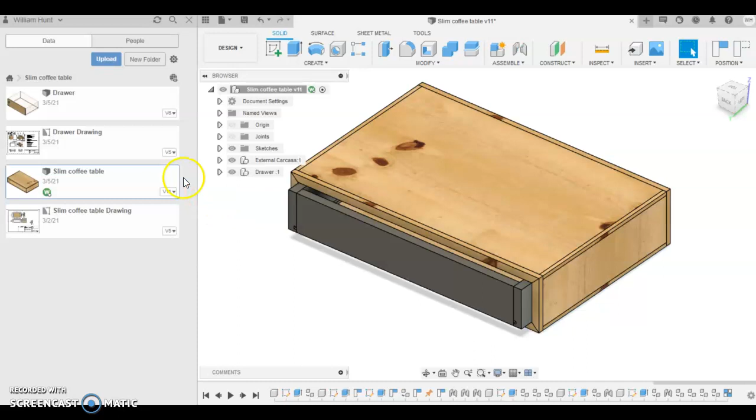I've been drawing up the slimline coffee table, and what I would like to do now is move to make some legs. What I'm going to do is come up to get a new file going.

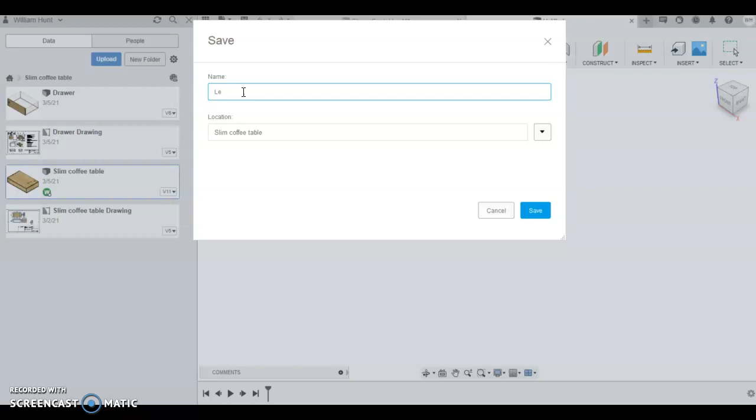I'll save that file, and I want to save it in the same folder. I've already located a folder called Slim Coffee Table. This one's just going to be called leg. We're going to use the leg 4 times, but we're only going to model it once.

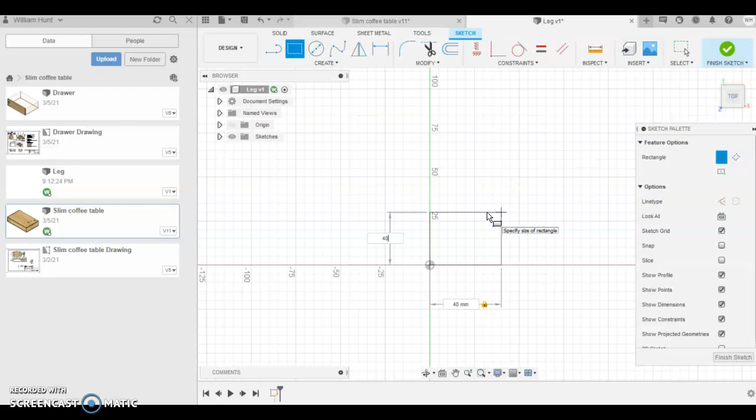I'm going to get the sketch, and start the sketch on the floor, on this plane here. The material we're going to use is 44 by 44, but I'm going to have my final size as 40 by 40, so that's our machine size.

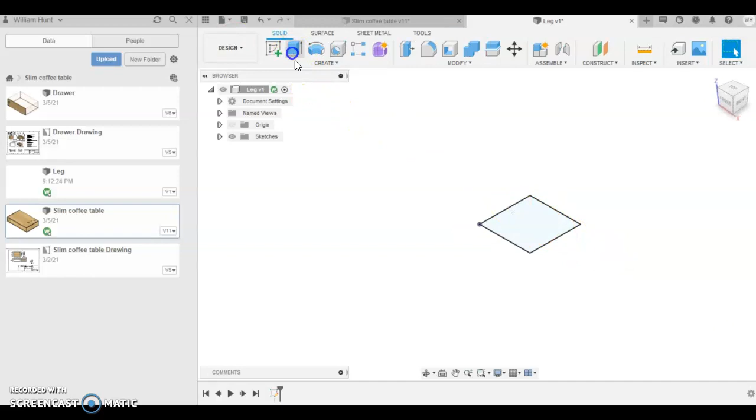The overall cabinet size is 125 millimeters. I want the height off the ground to be 525 millimeters, so I'll take that back to my sketch and finish the sketch, then extrude this 40 by 40 up to 400 millimeters.

So it's about time to refamiliarize ourselves with the controls. If I click the shift button and click the roller key down, I can rotate. That saves us going up here and clicking the view cube. The roller is very handy.

We can zoom in and out, and we can pan back and forward. Some of you are starting this task on the legs, so just familiarize yourself with that panning tool.

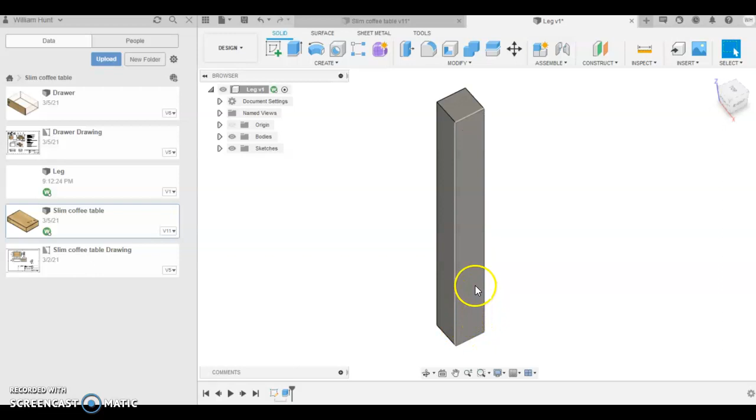The next thing we're going to do is the taper. So the taper of the leg, I'm going to draw on any side of the leg. Create a sketch, and then I'm going to go from the bottom, creating a line.

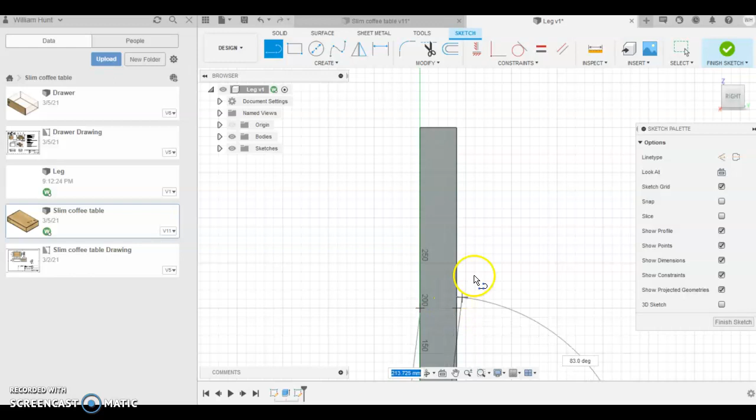This one's going to go halfway because we want the taper to be 20 mm at the bottom, and click somewhere along here. Just don't hit the middle because you can see it creates that kind of constraint, or the top. It creates the constraint, but just anywhere in between those two.

When I click the bottom, it auto constrains this one. So if I put a dimension on from here to here, it'll give me an error because it's always going to be in the center of that position. If I went and moved that 40 by 40 to 44 by 44, this would automatically change to 22.

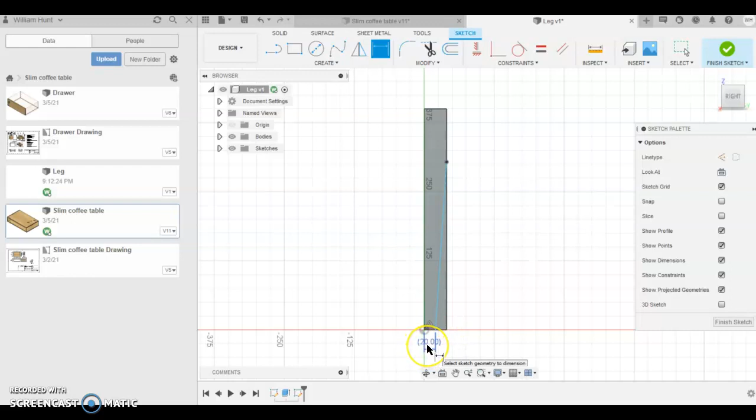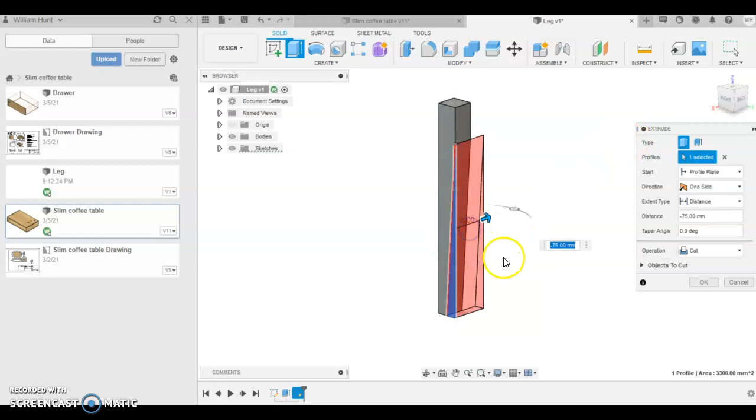This side here I'm going to do from the top down, and I'm going to make it 70. 70 is the size of our rail, so that makes it easy. I'm going to finish the sketch, and use the extrude tool to extrude that taper the whole way around. So if this was a piece of wood, this is exactly how we'd make the taper for the leg.

The next thing we're going to do is we're not going to draw on this surface. It's important not to, because if we draw on this surface, it's going to taper up at the angle that it is. It's actually the opposite to if you're using the bandsaw. So this one here, we're going to draw our taper on this back side of the leg.

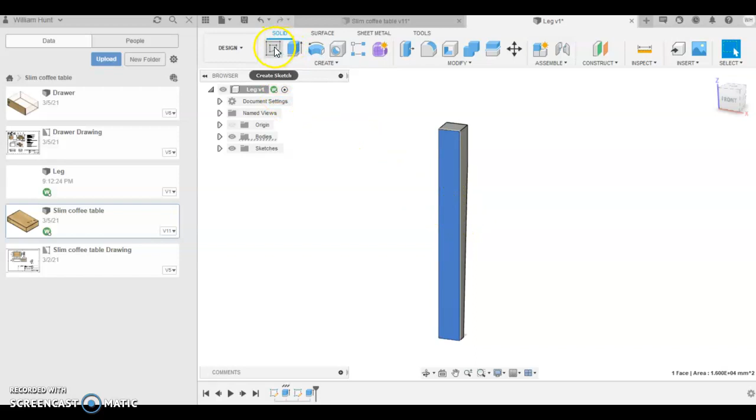We'll go to sketch, click the surface. It doesn't matter which way you taper, but we're going to do exactly the same as what we did before. So either to there or to there.

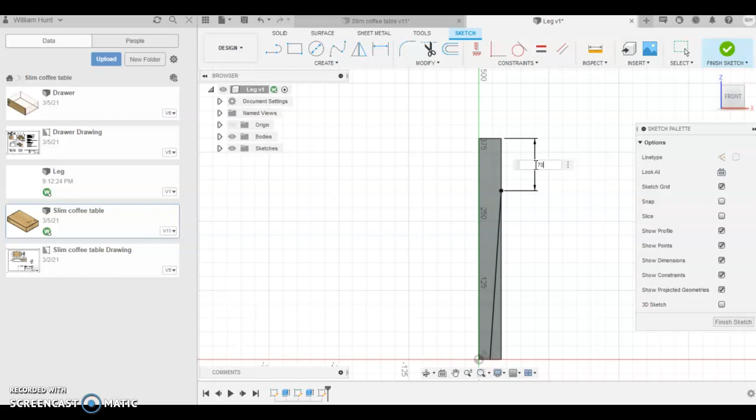I don't need this dimension down the bottom because it's got the little triangle there, but this one here we need to do the 70. Finish sketch, extrude, click that surface and pull that extrusion through.

So I've got my tapered leg, you can see it on both sides. Now we're going to do the dowel holes where we'll dowel bore the component.

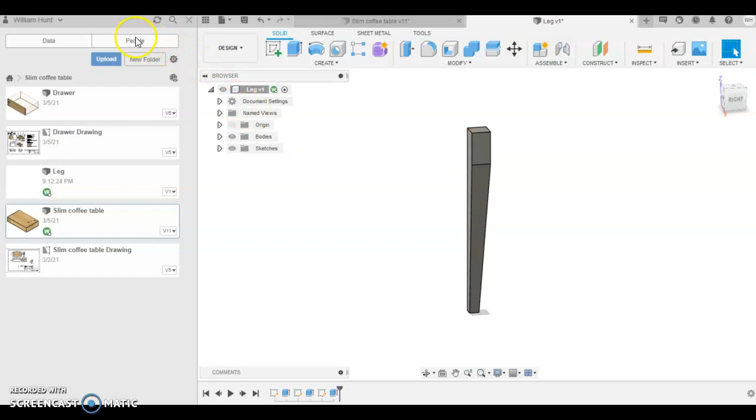As I rotate my work, you can see there's the two short edges, which is a 70 by 40 rectangle. So those two there, that's where I guess the rails will join on, there and there. Have a look at the orientation of the leg.

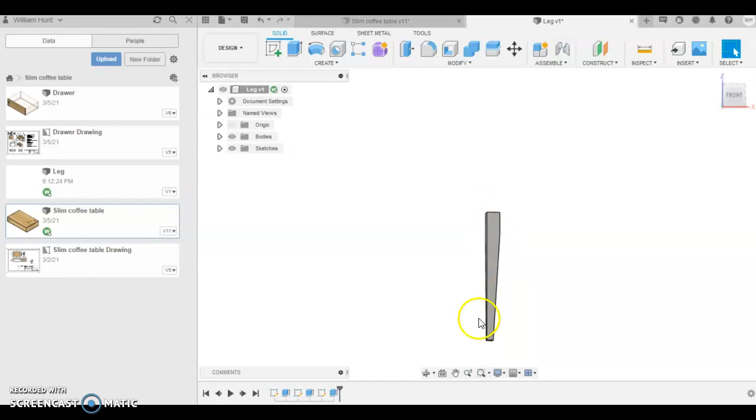So you want the nice straight leg to be on the outside. So we want the dowel holes to be on this side. I'm going to click the surface, and I'm going to create a sketch.

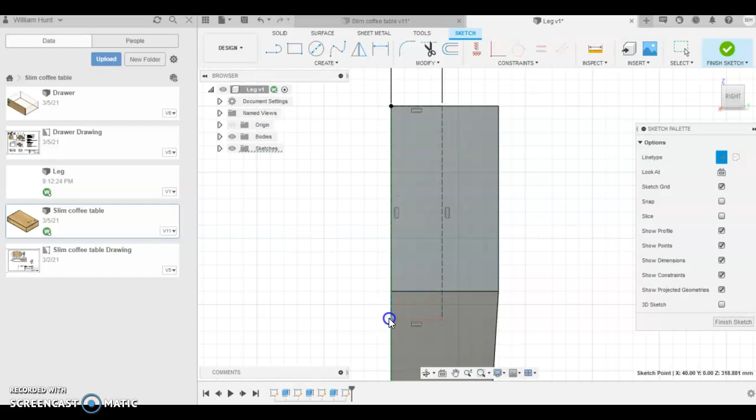Now I'm going to use a rectangle tool to block in where the rail will sit. We're going to use a 70 by 19 rail. If I type in 19, it's already 70 on the other one, so you can see I didn't put that measurement in, that'll be a floating construction line. But I can grab the corner and lock it to that point just by clicking and dragging.

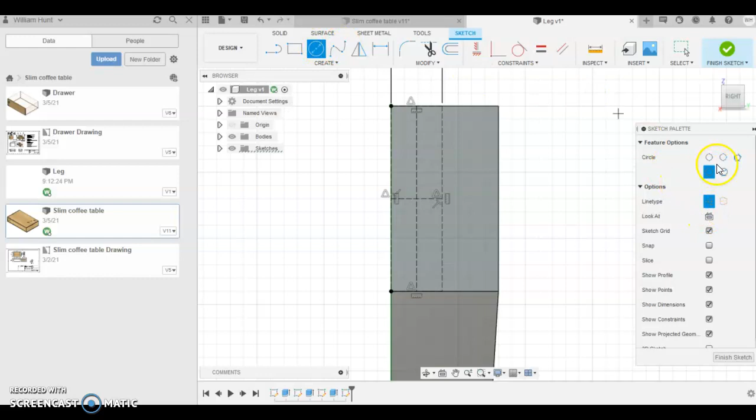I'm going to leave my construction line on, and go from the center down of my 70 by 19, and do the same across the center. It makes it really minimal with the dimensions. Zoom in a bit so you get the right line. You might have noticed I just turned off the construction line after I selected the circle.

The dowel boring machine drills 10mm holes, so that's our first one. It will be right in the middle of that rail. These two will need some dimensions.

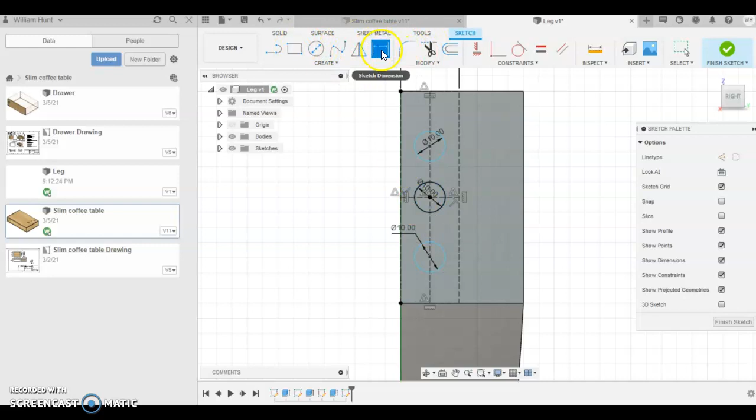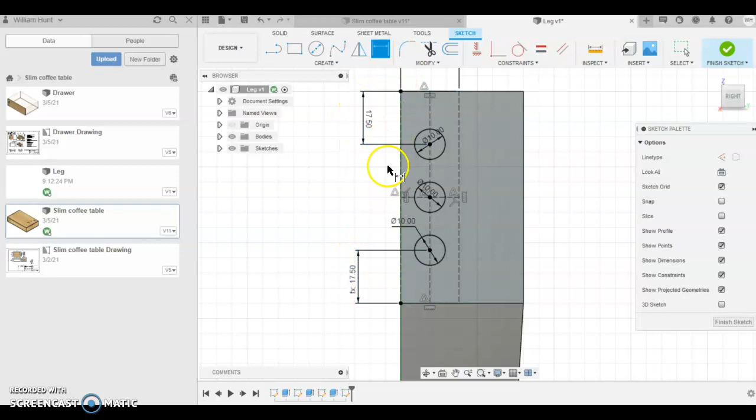Using the dimension tool, my mouse is a little bit slow, so what I normally do here is go 70 divided by 4. Let's get rid of the millimeters though, and that will automatically do the maths for you, which is sometimes easier. If you want to duplicate that, you can have that highlighted, click up here and press enter. Now if I change this one it would fix or change with the two. So that's my layout for the dowels.

Okay, finish sketch, extrude. Off the top of my head I'm not sure how far we extrude for these, so we'll just do a logical 20mm. And that's the dowel holes in one side.

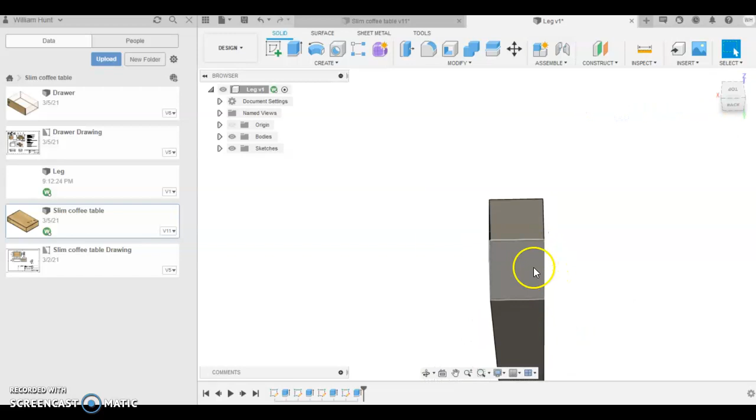And do the same to the other side, so rotate. This one here is going to be on this side, closer to the outside of the leg. Click the rectangle, click the sketch, rectangle, construction line. Remember this one's 70 by 19. I'm pressing tab in between to tab between the dimensions.

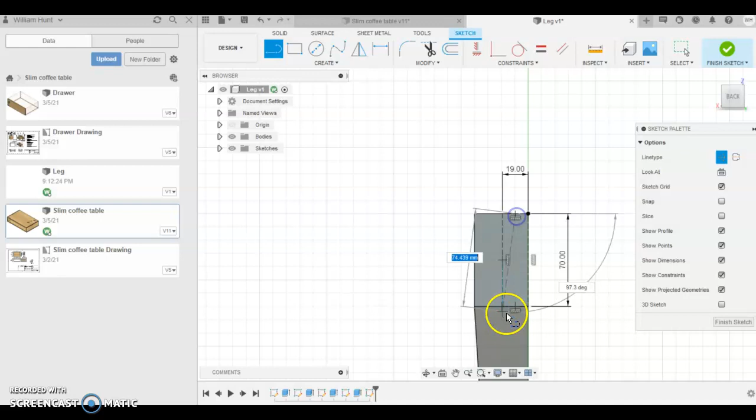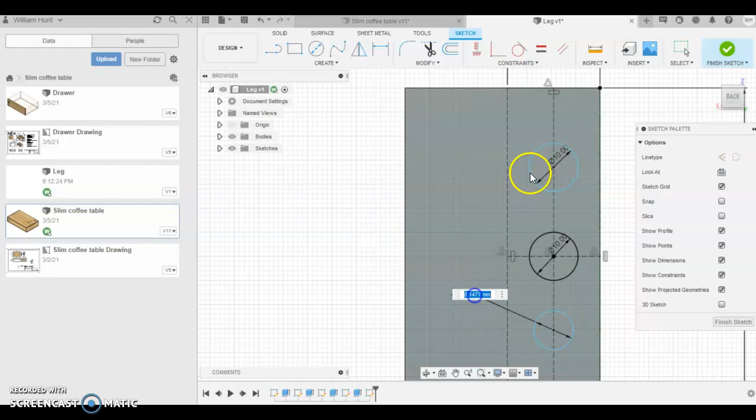Line, straight down the center, zoom in a little bit, straight across the center. Circle, turn the construction line off. 10. Block in my other two. From doing the other one, I missed that dimension. From doing the other two, I know that this one here is 17.5.

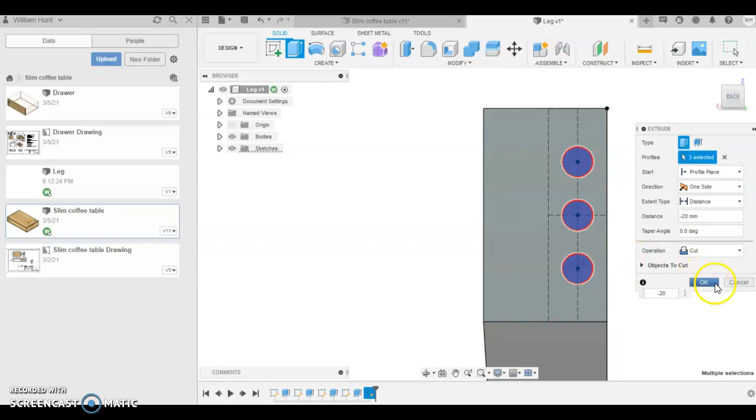I'm going to go to extrude, and -20. Let's rotate, check it's cutting the right direction. So that's a leg. If we would like to do it as a 42 by 19 here, we can get rid of a hole and move that leg up - sorry, the taper up. But that's one leg.

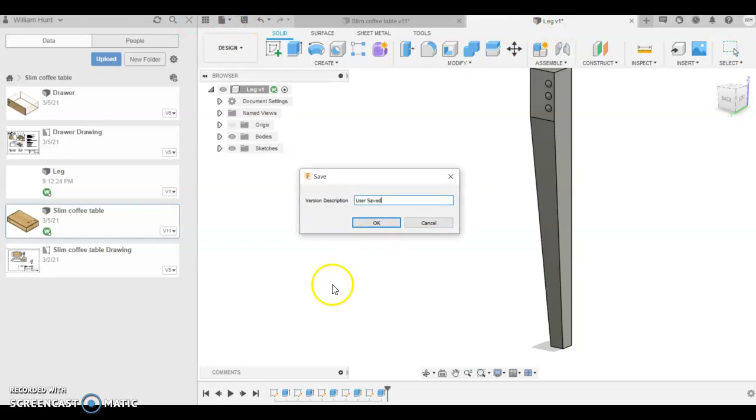Make sure you save it. Saved as a leg. Comes up into your section here.

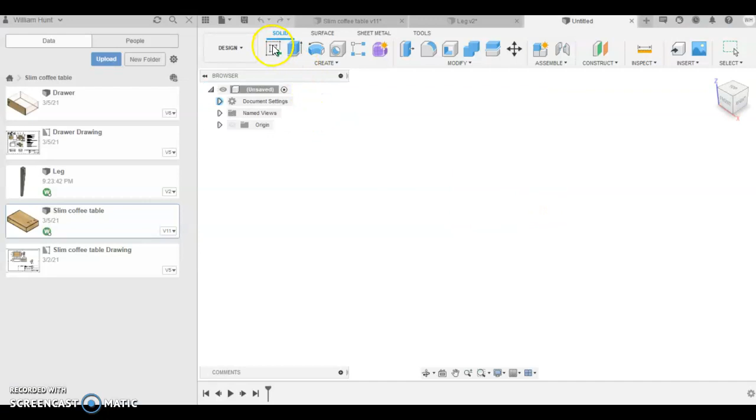The next thing we're going to draw is a rail. So I've got a new document, I'm going to save it as rail, call it long rail. We're going to get a sketch. Think about which plane the long rail would go on, so I'm going to click this one. We're using 70 by 19.

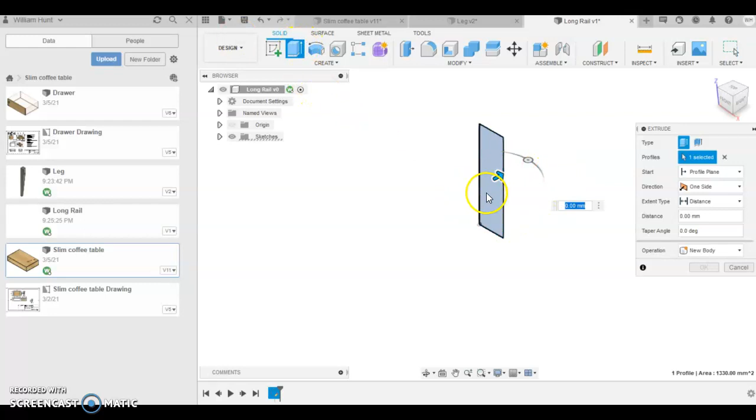Finish sketch, we're going to extrude this. So we need our cabinet to be 600, and we're going to minus 40 off each side, so minus 80.

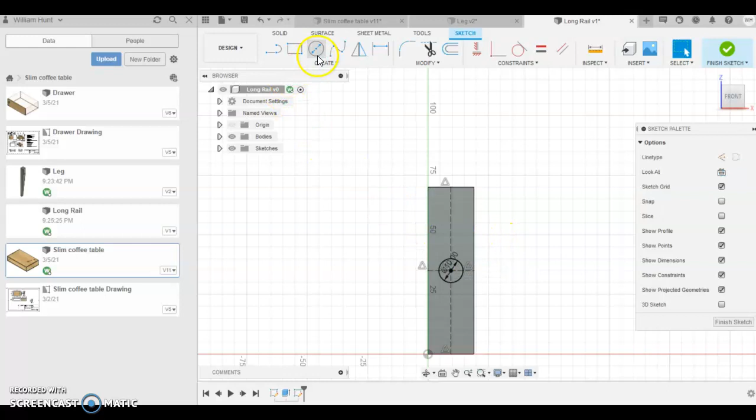We're going to click the end, and we're going to do exactly the same as what we did last time for the leg, so we're going to do these dowel holes. We'll do a construction line down the center, and across, circle, 10, and circle again, and last circle. We'll put out 17.5.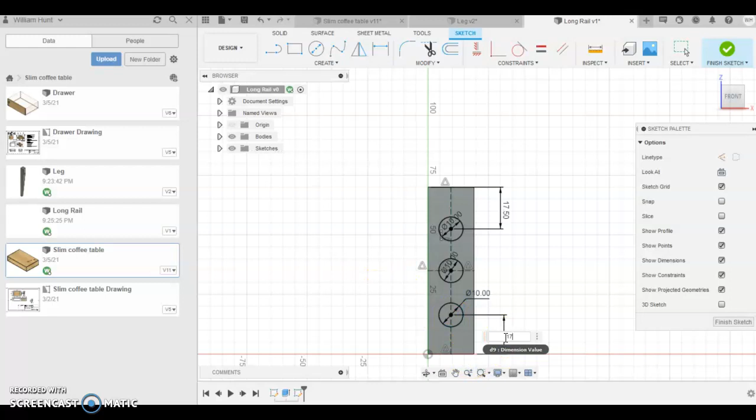And then we will extrude. So finish sketch, extrude, and we'll extrude at -20. So there's our dowel holes on that side.

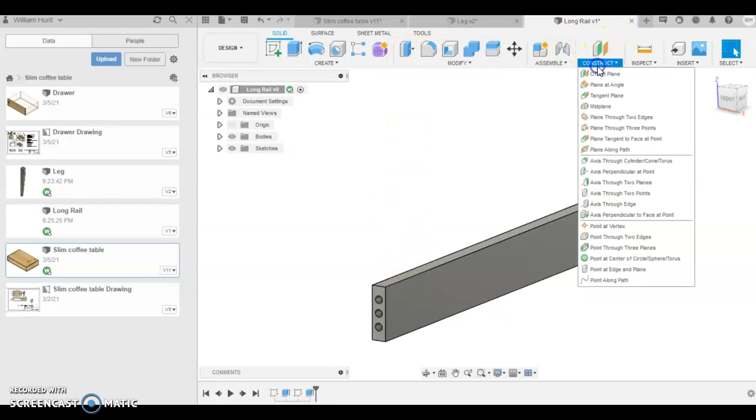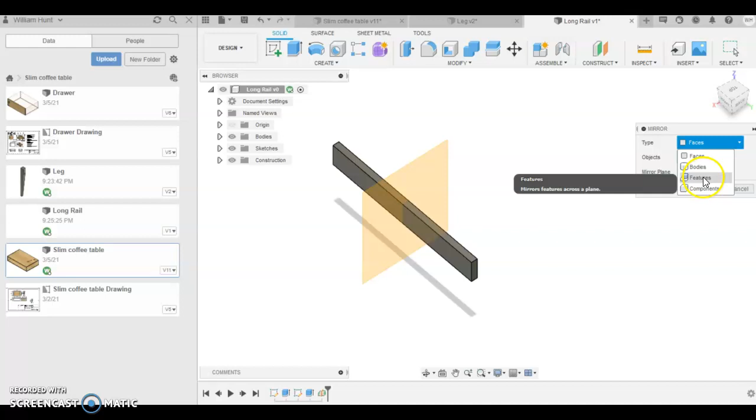A trick to putting the dowel holes on the other side, we're going to use the construction plane, and we're going to use a mid plane. We're going to click the surface there, and we're going to rotate on the surface here. Now we're going to go to mirror - under create, there's a feature called mirror. It's going to ask you what you want to mirror, so we want to mirror a feature. Our feature is here, and the mirror plane is here. Click OK, and we have got the dowel holes in each side.

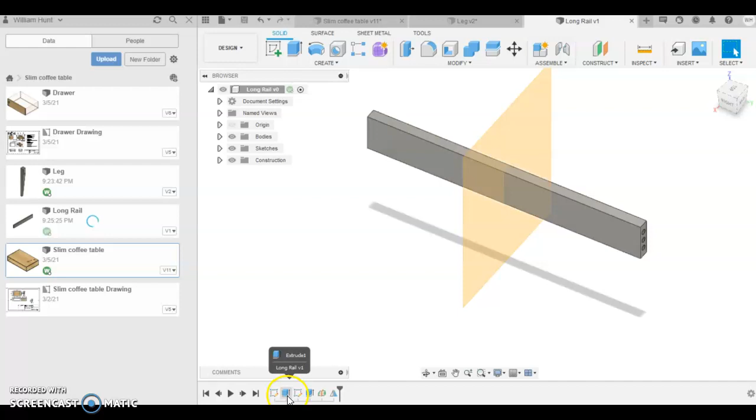I'm going to press save to that. Now I'm going to come down to this first extrusion, double click it. Now we want this one to be our short rail, so we're going to go 400 minus 80. That does the maths for us.

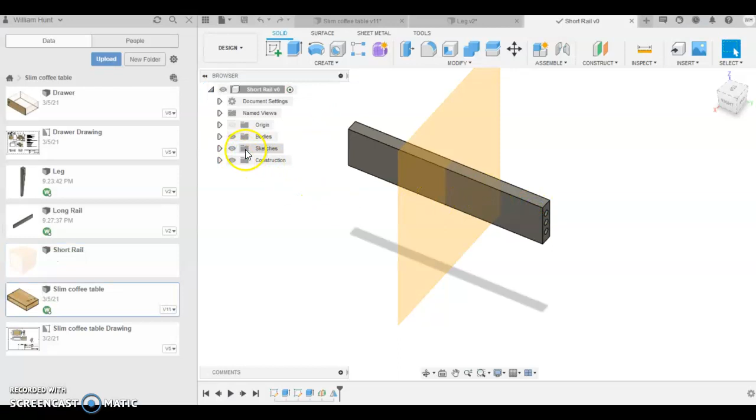We're going to come up here and go save as, and we're going to call this one short rail. Nice shortcut to get both pieces done. I'm going to turn off the construction plane here, that's going to get frustrating otherwise, and save again.

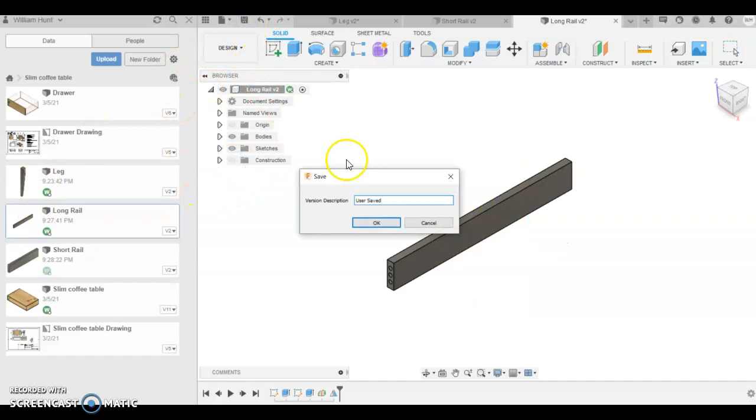I'm going to open my long rail up, and I'm going to do the same, and save again. So you can see I've got the leg, I've got the long rail, and I've got a short rail. That's all the components that we need to assemble the work together. Next video will show the assembly process.